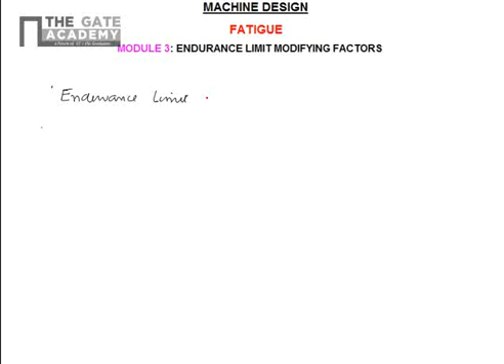Module 3: Endurance Limit Modifying Factors. In the previous module, we saw that the endurance limit of a material is very important for considering the fatigue strength of the material. And we have also seen that the endurance limit of the material was found out by conducting a test in a rotating beam machine. Also, we have seen that the beam specimen is prepared very carefully and tested under controlled conditions.

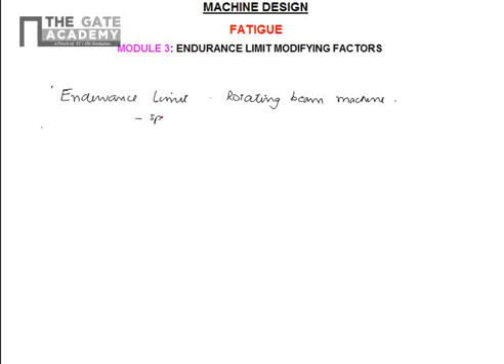That is, the specimen is prepared very carefully and tested under closely controlled conditions. Therefore, the endurance limit of mechanical or structural members do not match the endurance limit values obtained in laboratory.

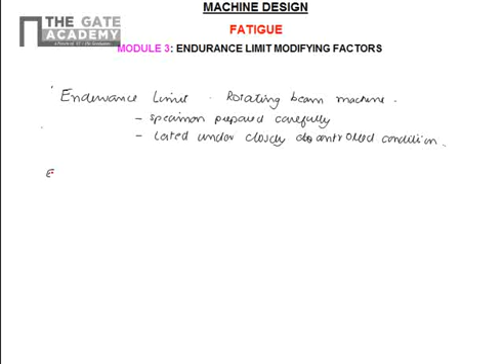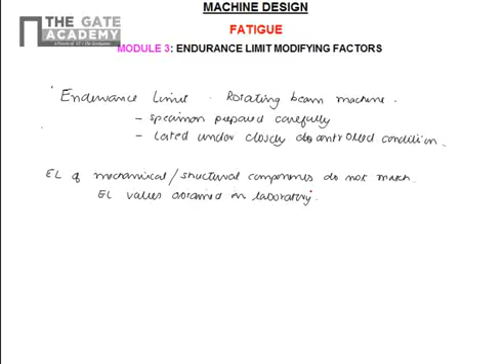Endurance limit of mechanical or structural components do not match the endurance limit values obtained in laboratory. That is because the laboratory specimen is prepared very carefully and it is tested under controlled conditions. But in actual case, the member will not be prepared carefully and it is not tested under the controlled conditions. Therefore, the endurance limit will be varying.

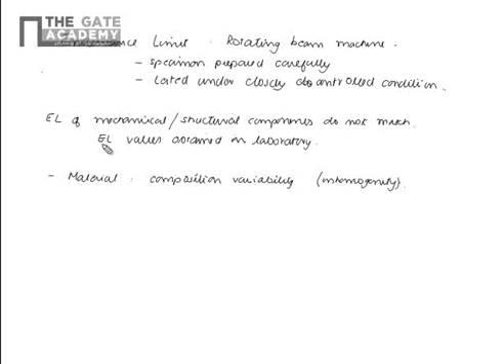And the various other factors which cause this difference in the endurance limit values can be attributed to material composition variability, or we can say inhomogeneity of material. In laboratory specimen, whatever material we use will be very specific, and the composition will be very homogeneous. But in actual conditions, when we use a material, it need not be homogeneous. So that will affect the endurance limit of the material.

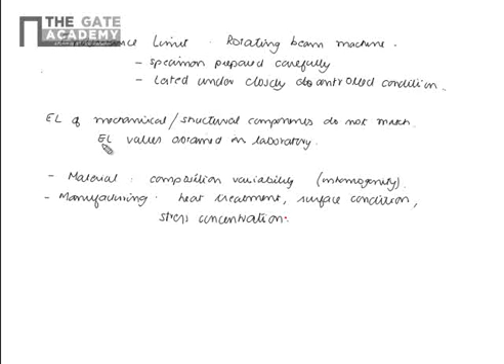Another one is the manufacturing process used, that is heat treatment, surface conditions, stress concentration, etc. We have seen that in a laboratory specimen, when we found out the endurance limit in the rotating beam machine, the surface finish was very good and there was no stress concentration. But in actual components, when the surface finish is less and stress concentrations are there, then the endurance limit comes down, because fatigue failure is a failure which originates from the surface. So the surface finish will play an important role. If the surface finish is not good, the endurance limit of the material will be less.

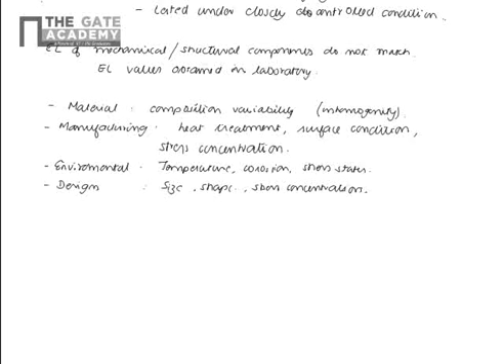Then maybe the environmental factors, like temperature, corrosion and stress states. The environmental conditions also affect the endurance limit of the material. Then finally, the design: size, shape, and the stress concentration. We have seen that fatigue cracks develop from the surface. Therefore, the larger the size of the specimen, the larger will be the surface area exposed for crack propagation. Therefore, the chance of fatigue will be more. Bigger specimens will have a lesser fatigue limit, and that also affects the endurance limit of the material.

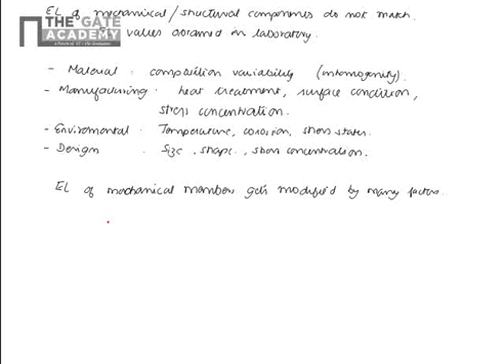Therefore, we can say the endurance limit of mechanical members gets modified by many factors. So we can write Se, that is the endurance limit of the mechanical member, is equal to Ka, Kb, Kc, Kd, Ke, Kf, I'll put Kg because Kf we are using somewhere else, into Se dash, where

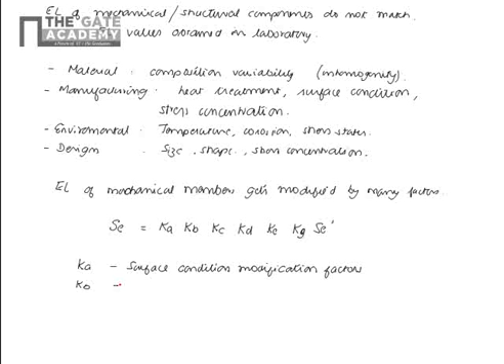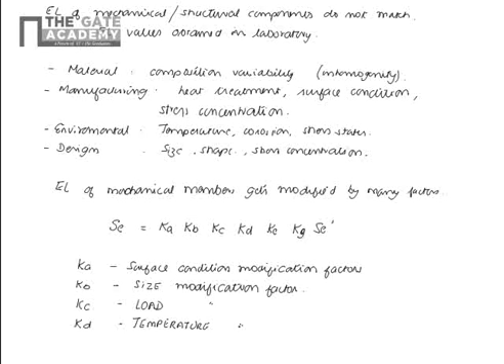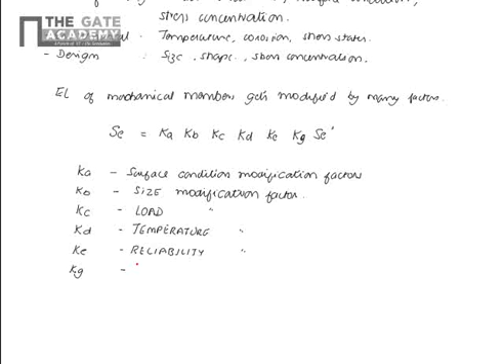Ka is the surface condition modification factor, Kb is the size modification factor, Kc is a load modification factor, Kd is a temperature modification factor, Ke is the reliability modification factor, and finally Kg, that is a miscellaneous effects modification factor. And Se is the endurance limit or EL of the member in use, and Se dash is the rotating beam specimen endurance limit.

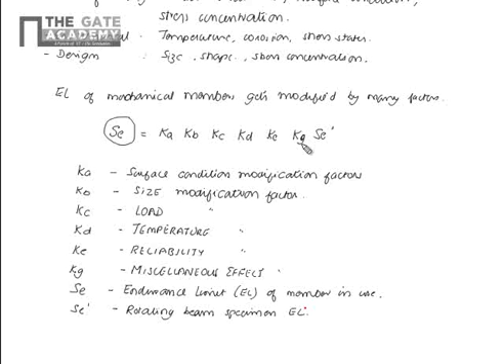Therefore, the endurance limit which we have to take for calculation is now Se, and that is nothing but the rotating beam specimen endurance limit modified by many factors: surface condition factor, size factor, load factor, temperature factor, reliability factor, and miscellaneous effects factor. So we have to see what these factors are. We have seen that the endurance limit of a mechanical member is nothing but the endurance limit of the rotating beam specimen modified by several factors like Ka, Kb, Kc, Kd, Ke, Kg. We'll see the first factor, which is the surface condition modification factor.

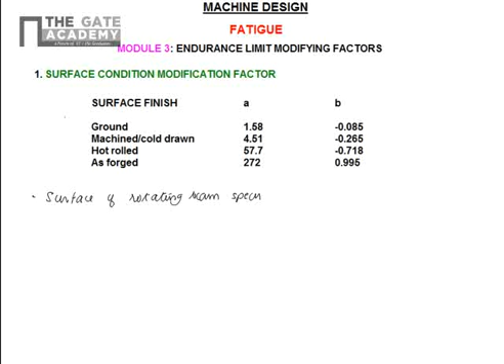The surface of a rotating beam specimen is highly polished, and the surface modification factor depends on the quality of finish of the actual part surface. But in actual members, the surface finish will not be the same as the surface finish of the rotating beam specimen. So the surface finish depends on the manufacturing process.

The above table shows the surface finish for various processes. If it is a ground component, the surface finish factor, we can say that Ka is nothing but a into Sut raised to b. This is an important relation. Here Sut is the ultimate tensile strength of the material, and Ka is the modification factor.

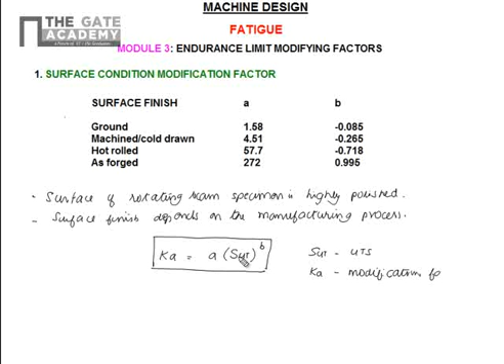A and B are the parameters which depend on the manufacturing process. If it is a ground component, the A value should be taken as 1.58, B should be minus 0.085. If it is a machined component, it is 4.51 and minus 0.265. If it is a hot rolled component, A should be taken as 57.7 and B should be minus 0.718. If it is an as forged component, A should be 272 and B should be minus 0.995. You can see the variation of A and B.

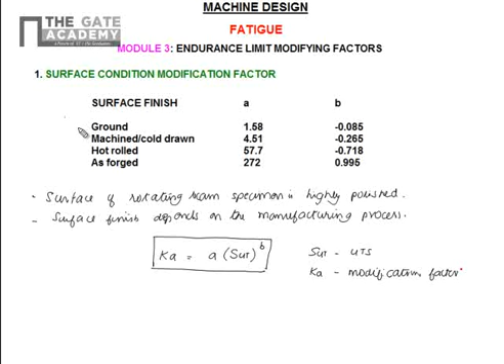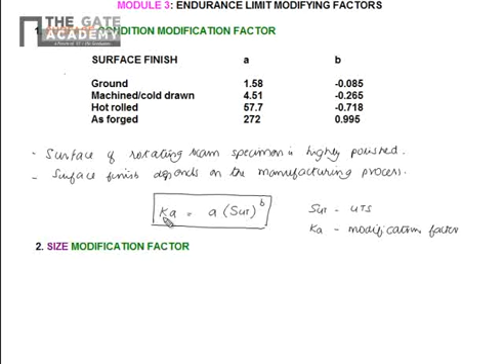You can see that the surface finish factor depends very much on the manufacturing process. For different manufacturing processes, you have a different value of Ka, and it is a very significant factor. So that is about the surface condition modification factor. We have seen that it depends on the manufacturing process, and there is a wide variation of the surface finish factor depending on the manufacturing process.

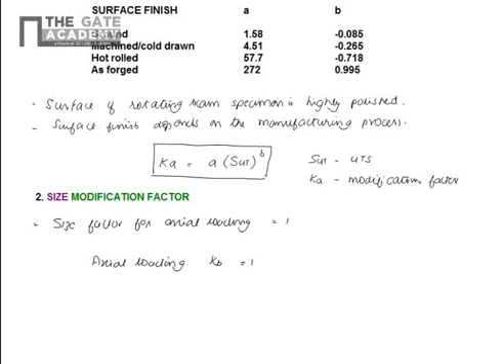Now we will come to the second factor, which is the size modification factor. The size factor for axial loading is taken as 1. That is, if it's axial loading, Kb equals 1. Therefore for axial loading we can say Kb is equal to 1, and for bending and torsion

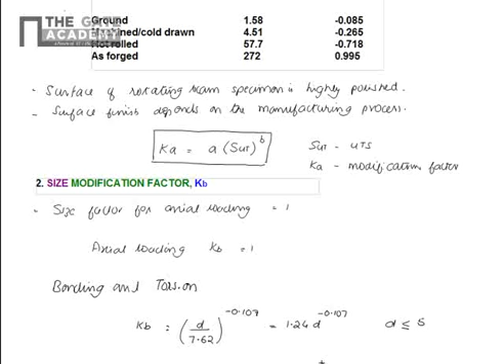Kb is given as (d by 7.62) raised to minus 0.107. That is equal to 1.24 d power minus 0.107 when d is less than or equal to 51 mm, and this is equal to 1.51 d raised to minus 0.157 when d is greater than 51 mm.

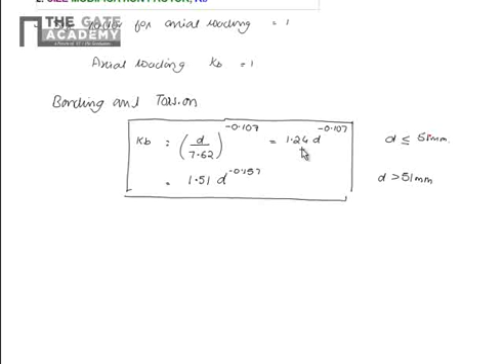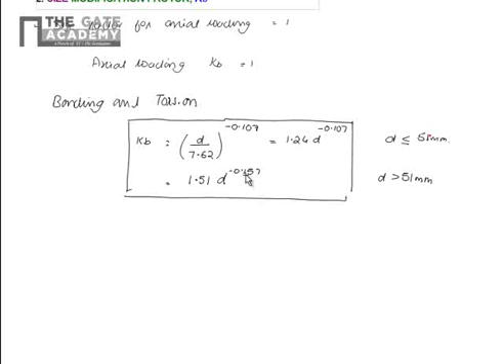This is the relation of the size modification factor with respect to the size of the specimen. That is, if d is the diameter of the specimen, Kb is given by this relation. If the diameter is less than 51 mm, Kb is given by 1.24 d power minus 0.107, and if d is greater than 51 mm, Kb is given as 1.51 d raised to minus 0.157. This is the size modification factor.

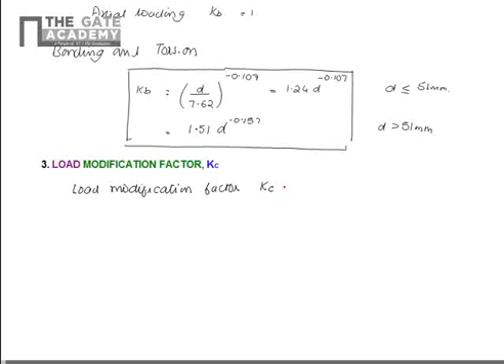Then we have the load modification factor. The endurance limit also depends on the type of load which we apply. For the rotating beam specimen, where bending was the load, we have not considered any load modification factor. That is just because the load modification factor is 1 for bending. That is, the load modification factor Kc is equal to 1 for bending, equal to 0.85 in case of axial loading, and equal to 0.59 for torsional loading.

So it depends on the loading. The endurance limit also gets modified because of the type of loading which we apply. If it is a bending load, then there is no modification. The modification factor is 1. If it is axial loading, the endurance limit of the component gets modified by a factor 0.85. And if it is a torsion loading, it gets modified by 0.59.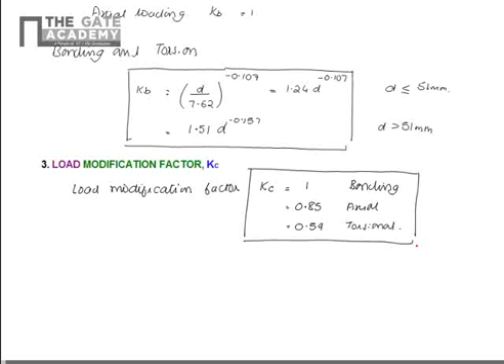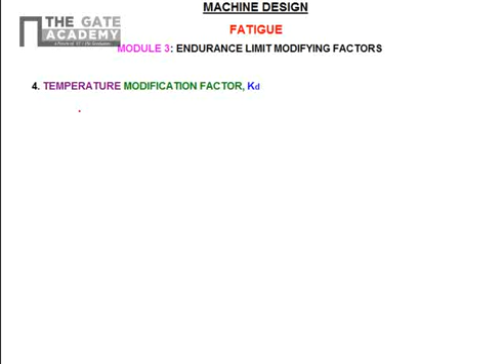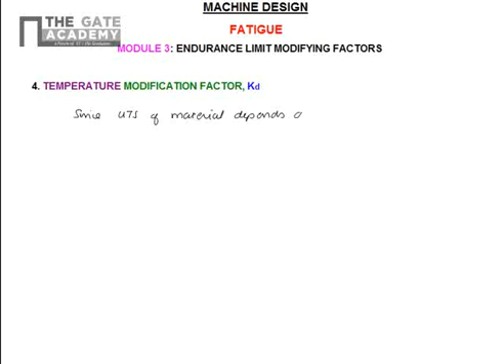The fourth factor is the temperature modification factor. We know that when the temperature becomes very high, even the ultimate tensile strength of the material changes. This UTS of the material depends on the temperature. And we have seen that the endurance limit is nothing but 0.5 times UTS of the material. Since UTS of the material changes with temperature, the endurance limit, which is nothing but 0.5 times SUT, also changes.

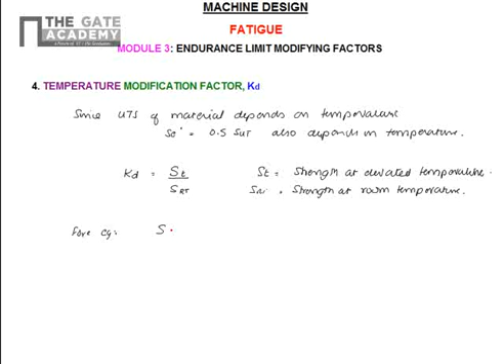The temperature modification factor Kd is given as St by Srt, where St is the strength at an elevated temperature and Srt is the strength at room temperature. For example, the strength at room temperature of a material is some 600 MPa, and at 500 degrees C it's some 400 MPa. Then we can say the factor Kd is nothing but 400 by 600. This will come to 2 by 3 or 0.667. So this way we can find out the temperature modification factor of the material.

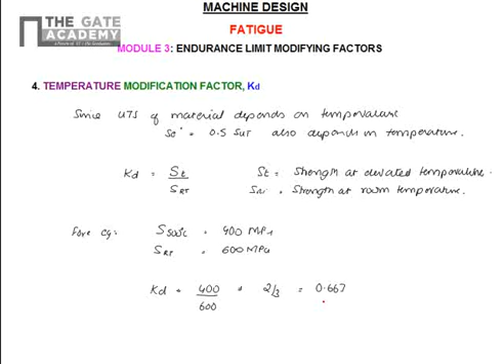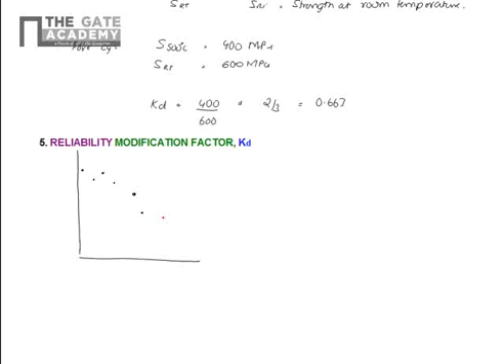Knowing the strength of the material at elevated temperature as well as room temperature, we can find the temperature modification factor. Now we have the fifth factor, which is the reliability modification factor. The reliability factor is used for accounting for the scatter of the endurance limit data for materials. We know the endurance limit of a material is a straight line in the SN diagram. When we did the test, we actually got a scatter of a lot of points, and we tried to connect these points by some straight line. Thus we got the SN diagram of the material. Therefore this endurance limit is very highly scattered data, and the reliability factor is used for accounting for the scatter of the data.

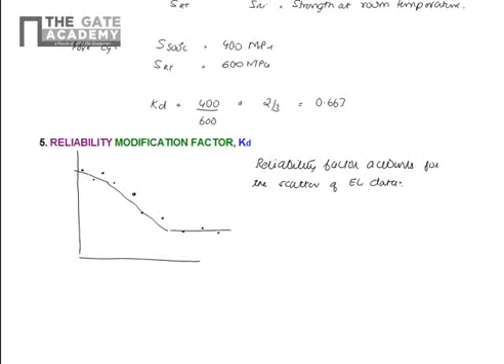The reliability factor accounts for the scatter of the endurance limit data. That is, how much the data is scattered, we can know from the reliability factor. And for the reliability factor, if it is 50% reliability, we take the factor as 1. If we want 90% reliability, we take the factor as 0.897. For 95% reliability of the data, we take the Kd as 0.868.

For 99% reliability, we take the reliability factor as 0.814. And if you want the data to be 99.9999% reliable, then we take the modification factor as 0.62. In the rotating beam specimen, we have taken the reliability factor as 1, because we did not know about the reliability factor at that time. So we assumed the reliability factor as 1. In other words, rotating beam data has 50% reliability. So that is the reliability modification factor.

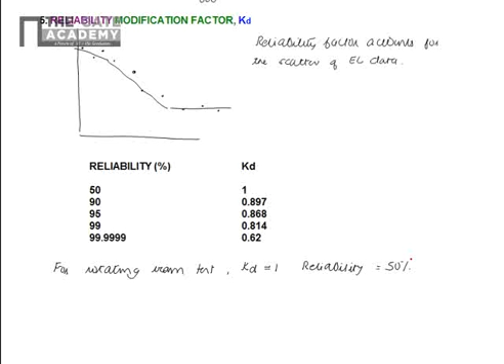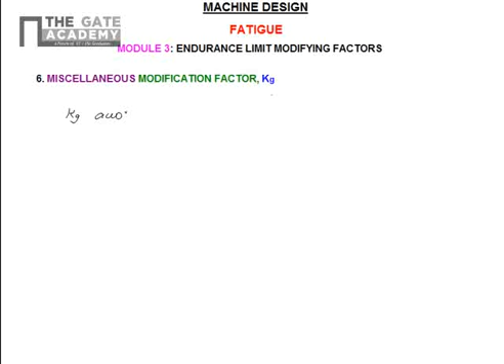Now we will see the miscellaneous factor. The next factor is the miscellaneous modification factor. In many textbooks, the miscellaneous modification factor is taken as Kf. Here I am not using that nomenclature because we are using Kf for the fatigue stress concentration factor, so we should not get confused between these two. So I am using the factor Kg for the miscellaneous modification factor. Kg is intended to account for reduction in endurance limit due to other effects, due to residual stresses.

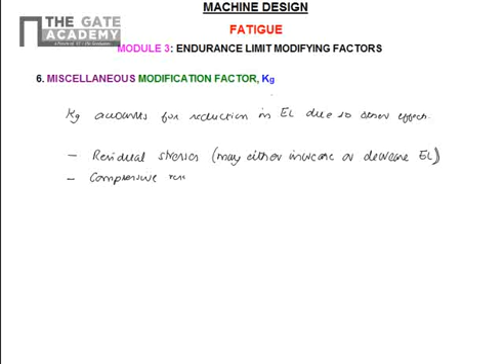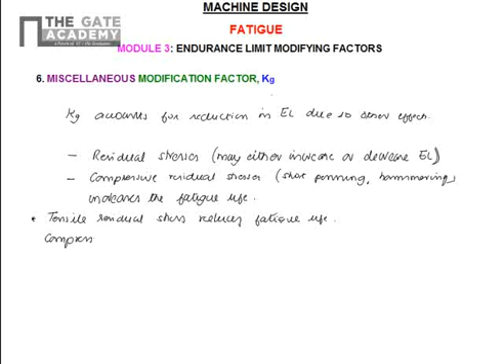This may either increase or decrease the endurance limit. It also accounts for compressive residual stresses, like shot peening, hammering, etc., which increase the fatigue life. Therefore, one important point is that tensile residual stresses reduce the fatigue life, whereas compressive residual stress increases the fatigue life. It also considers corrosion, another important factor which reduces the fatigue life of a component. Then we have stress concentration, discontinuities, which also reduce the fatigue life. These effects are considered in the miscellaneous effects factor Kg.

So these are the six endurance limit modification factors: size modification factor, surface condition modification factor, load modification factor, temperature modification factor, reliability modification factor, and miscellaneous effect factor. In some cases, the factors will be directly given to you and you will have to find the endurance limit of the material. Sometimes it will be indirectly given, like if the problem says the component is machined, then we have to take the surface condition factor according to that manufacturing process. And if the diameter of the specimen is given, we have to take the size factor accordingly. In most cases the size factor will be directly given. If it is not given, then you have to find it by the relation we went through earlier, which depends on the diameter of the specimen.

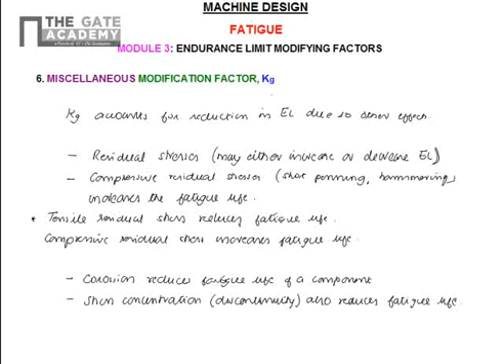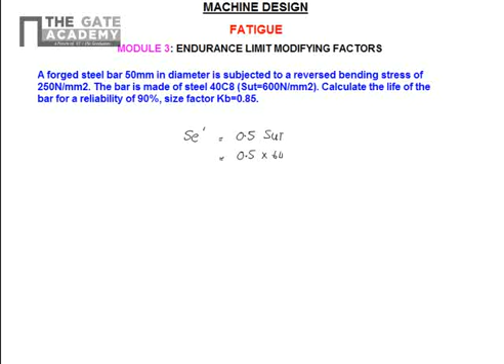We'll try to solve a problem. A forged steel bar 50 mm in diameter is subjected to a reversed bending stress of 250 Newton per mm square. The bar is made of steel 40C8, which is the grade of the material, for which SUT is 600 Newton per mm square. Calculate the life of the bar for reliability of 90% and take size factor as 0.85. Now, how do we solve this problem? First we find the endurance limit of a rotating beam specimen. We know that the endurance limit of a rotating beam specimen, Se dash, is given as 0.5 times SUT, that is 0.5 into 600, which will be 300 Newton per mm square.

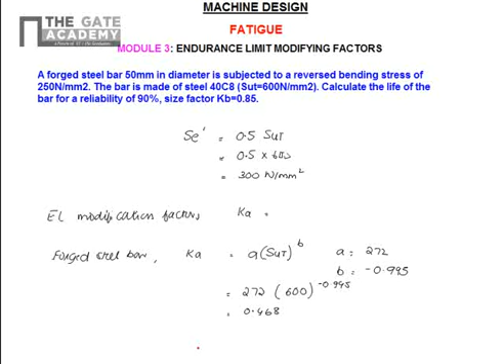Now, what are the endurance limit modification factors? Ka, the surface condition modification factor. It is a forged steel bar, and for a forged steel bar, Ka is given as A into SUT raised to B, where A is 272 and B is minus 0.995. So can we calculate how much it will come to? That will be 272 into SUT, which is 600, raised to minus 0.995. That will be 0.468. Now the size factor Kb is given as 0.85.

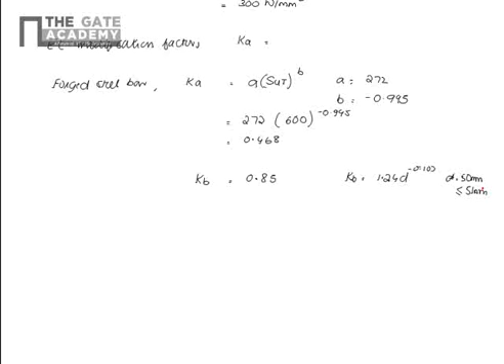In case the size factor is not given, we can find it by the formula Kb is equal to 1.24 d raised to minus 0.107. Since d is equal to 50 mm, which is less than or equal to 51 mm, we can take this relation for Kb and find the Kb value if it is not given. Here it is given, so we will take Kb as 0.85 only. Now what other factors can come here? It is told that it's a bending stress. So what will be the load modification factor Kc? We know that for bending load, the load modification factor Kc is equal to 1.

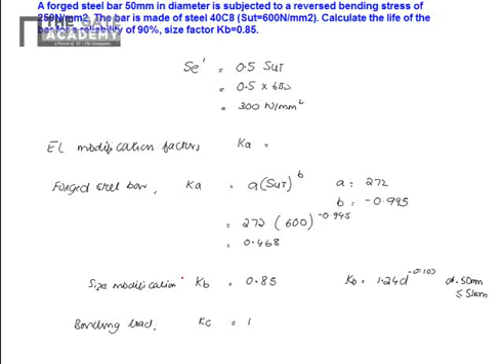Now what other modification factors are there? Temperature modification factor: temperature is not told, so we will not take that. Now reliability modification factor, and what is the reliability they have asked for? They want 90% reliability. So we know from the table that for 90% reliability, you can take the reliability modification factor Ke is equal to 0.897. So these are the modification factors for endurance limit.

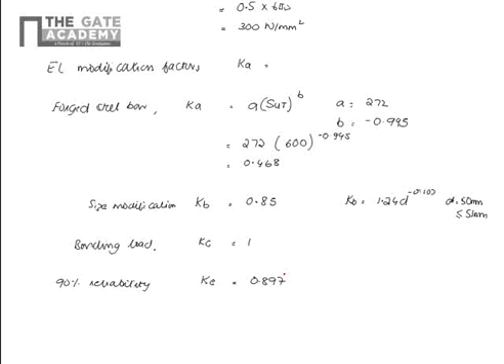So what will be the endurance limit of the mechanical component? We can write Se is equal to Ka, Kb, Kc, Kd is not there, so we will write Ke into Se dash. So what will this be? Ka is 0.468, which we have found out here. 0.468 into, what is Kb? Kb is 0.85 into, what is Kc? Kc is 1 into, what is Ke? Ke is 0.897

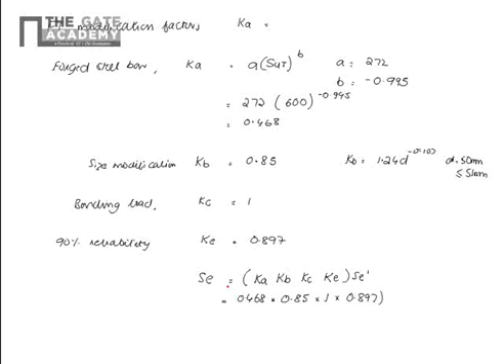into Se dash. What is Se dash? Se dash is nothing but 300 Newton per mm square. So what will this be? 0.468 into 0.85 into 1 into 0.897 into 300. This is 107.05 Newton per mm square. This is the Se of the material.

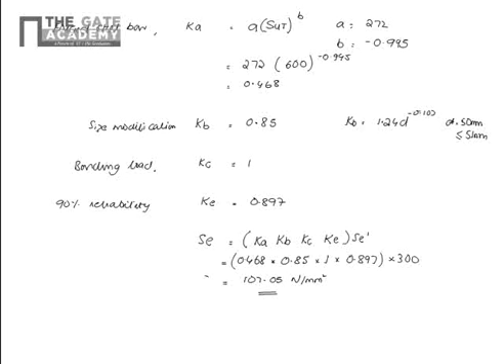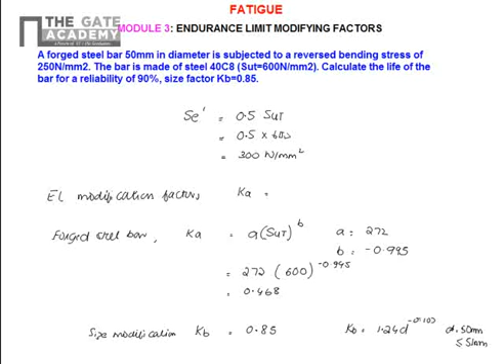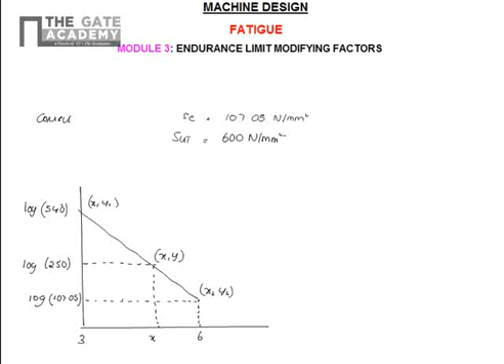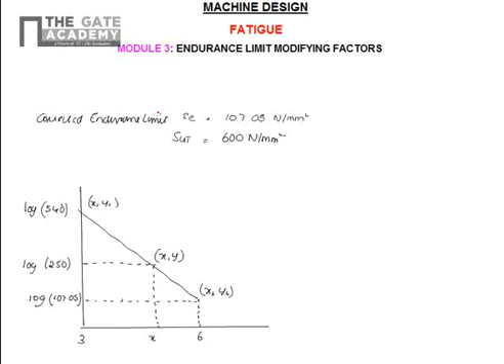Now, to estimate the life for a completely reversed bending stress, we can use the SN curve for estimating the life of the component. Now, we'll see how to use the SN curve. We'll try to draw the SN curve for this above problem. We have Se, the corrected endurance limit, as 107.05 and the ultimate tensile strength of material is 600 Newton per mm square. And we know how to draw an SN curve. The starting point will be 0.9 times Sut, and 0.9 times Sut is nothing but 0.9 into 600, that is 540 Newton per mm square.

So the first point of the SN curve will be log of 540 and that will correspond to 10 raised to 3 cycles. And the corrected endurance limit is 107.05. Therefore, that will correspond to 10 raised to 6 cycles. Therefore, for 10 raised to 6 cycles, the log is 6 and the corresponding strength is log of 107.05. And we have seen that in the above problem, the bending stress is 250 Newton per mm square. So, what is the number of cycles corresponding to this stress? We have to find the value of this x. And this we have already seen earlier.

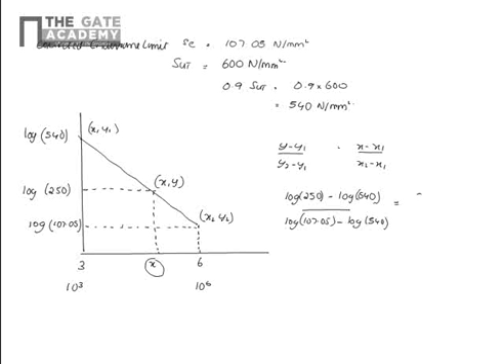We have the equation for the line as (y minus y1) by (y2 minus y1) is equal to (x minus x1) by (x2 minus x1). Here y is log of 250, minus y1 is log 540, by y2 is log 107.05 minus y1 is log 540. This is equal to x, which is what we want to find. x minus x1 is x minus 3, by x2 is 6 minus 3. So log 250 is 2.398 minus log of 540, which is 2.732, divided by log of 107.05, which is 2.03, minus log of 540, which is again 2.732. This is equal to (x minus 3) by 3. So this is 2.398 minus 2.732, which is minus 0.334, divided by 2.03 minus 2.732, which is minus 0.702, equal to (x minus 3) by 3.

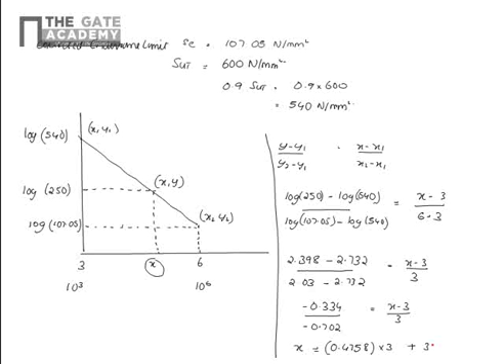Therefore, x equals minus 0.334 divided by minus 0.702, that is nothing but 0.4758, into 3 plus 3. 0.4758 into 3 plus 3, that is 1.4274 plus 3, which is equal to 4.4274. Therefore, the number of cycles n is equal to antilog of 4.4274, that is nothing but 26,754.69. So that is equal to 26,755 cycles.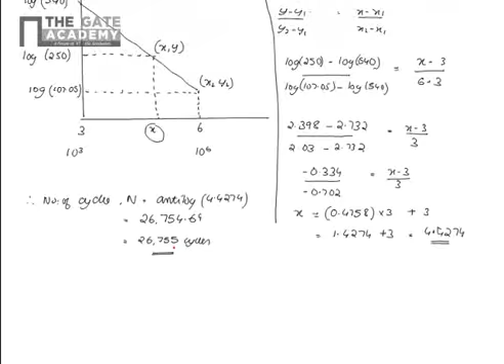So this way we can find out the number of cycles corresponding to the strength of 250 megapascal. And an important thing to be kept in mind is, in this SN curve, the strength corresponding to 10 raised to 6 cycles is now the corrected endurance limit. Earlier we did not have the correction value, so we had taken the rotating beam specimen endurance limit. Now the endurance limit of the rotating beam specimen is modified by the various factors we have seen. So the corrected endurance limit has to be taken here, and this will be 0.9 times the ultimate tensile strength here. This will be the corrected endurance limit, and this will be log of 10 raised to 3, that is 3, and this will be log of 10 raised to 6, that is 6. And the stress which they have asked for will come in between these two values. The number of cycles can be found out in this manner.

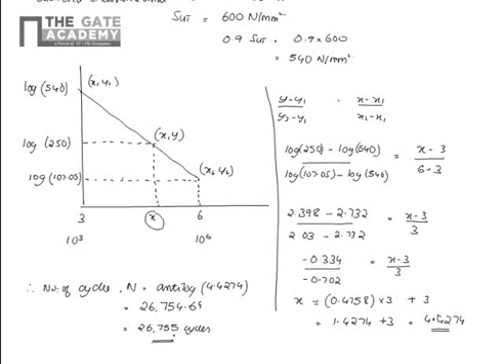So this completes the module on the endurance limit modification factors. In the next module, we will be seeing about the stress concentration and the notch sensitivity of the materials.